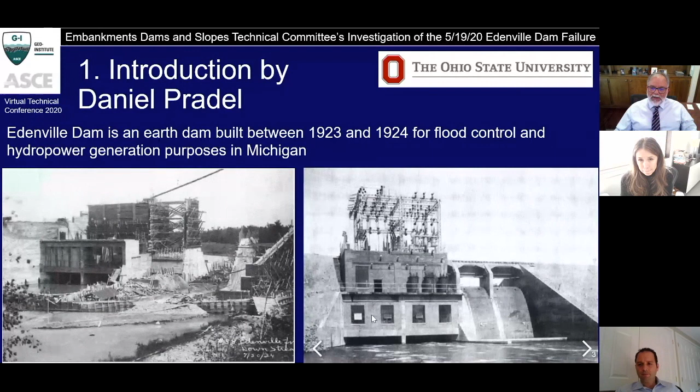Edenville Dam is an earth dam that was built between 1923 and 1924. It was built for flood control as well as hydropower generation. In the lower left, you see a picture taken on July 30, 1924. The earth dam is almost reaching its final elevation, and the power plant and the spillways are under construction. The lower right image shows the earth dam completed, as well as the spillway and the power plant. Something relevant about these years, 1923 to 1924, is that it was before the soil mechanics principles pioneered by Carl Terzaghi were widely known in the US, and before the quality control measures for soil compaction were proposed by Proctor in the 1930s.

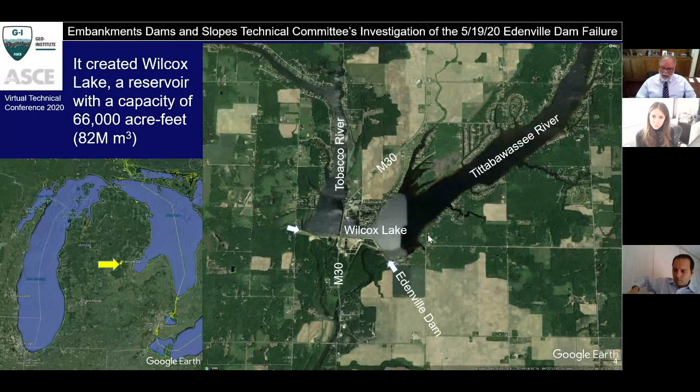In terms of setting, the Edenville Dam was built at the confluence of two rivers, the Tobacco River on the west and the Tittabawassee River on the east, and together they form Wixom Lake because of Edenville Dam. The dam is crossed by M30 highway at the site. Here is a view looking south where you see both rivers, the lake, Wixom Lake, the M30 road highway as well as the bridge, and the two spillways, one on the Tobacco River side, one on the Tittabawassee River side, where also the powerhouse was located. The failure took place where the yellow arrow is located, between the powerhouse and spillway and the left abutment of the dam. The total length of the dam for scale is about 2 kilometers, 6,600 feet, and it had a maximum height of 54 feet or 16 meters.

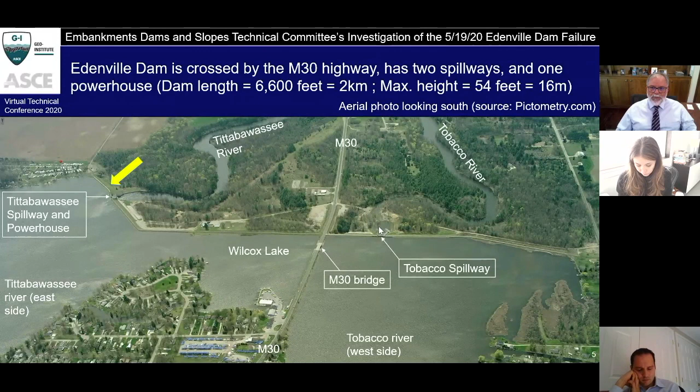What is particular about this failure is that it occurred during the day and was captured on video. Here you see the failure taking place. And also through Twitter, we have the exact location of the videographer, which is also helpful.

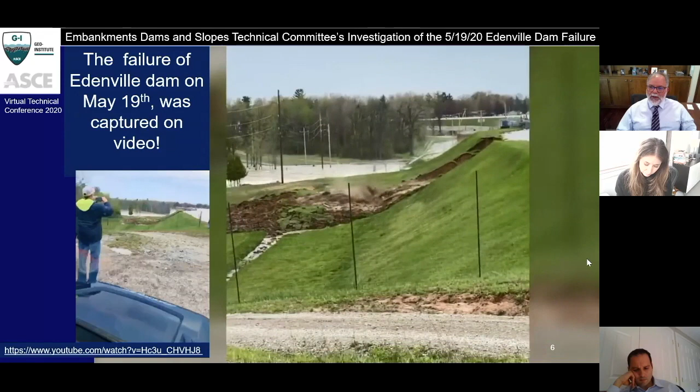After the failure took place, the dam breached and water started escaping Wixom Lake. We also have another video taken from the air about an hour later that shows how the breach rapidly enlarged and started sending water downstream towards Sanford Dam and Sanford Lake.

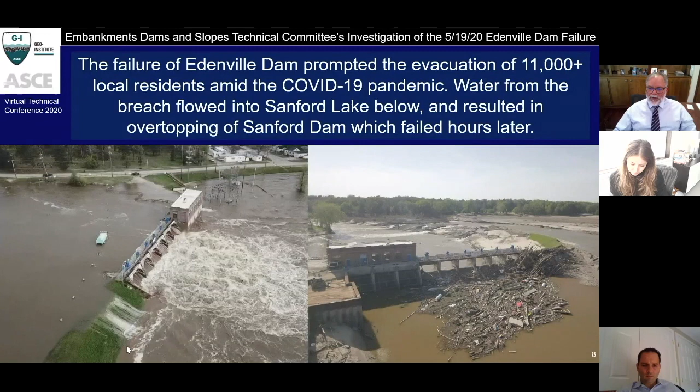The Edenville failure prompted the evacuation of about 11,000 local residents. This happened amid the COVID-19 pandemic. As Sanford Lake started to rise, very quickly Sanford Dam began to overtop, as you can see on the lower left of the image. This is Sanford Dam, which was built at about the same time using the same techniques as Edenville Dam, and because of overtopping, the dam was completely destroyed.

These dam failures resulted in devastating consequences in the local communities of Edenville, Sanford, and Midland, and many houses were removed off their foundations. We had a large amount of flooding and devastating consequences for many of the local residents.

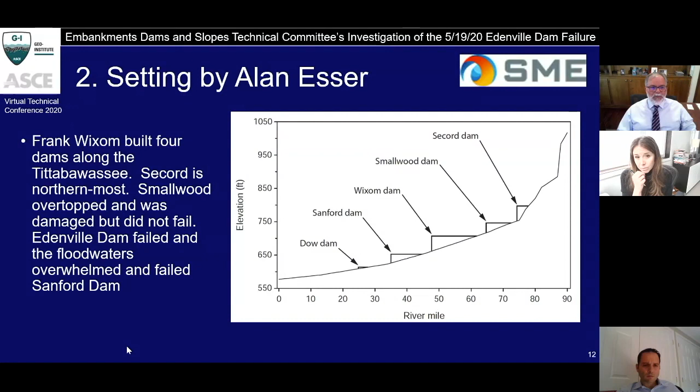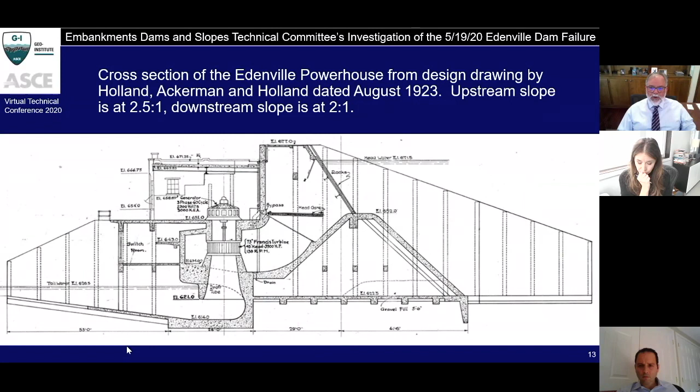Let me use some of his slides. The dam is one of a series of dams built by Frank Wixom. We have some cross sections showing how Edenville Dam was built. It had 2.5 to 1 slopes on the upstream side and 2 to 1 slopes on the downstream side. This is a drawing made in 1923 by the original designers.

The drains in the dam were vitrified clay pipe that was placed loosely with loose joints along the foundation soils. So in terms of consequences, we had loose permeable fill, poor or no foundation preparation, debris in the fill, and a homogeneous embankment, meaning a dam without a clay core was actually built.

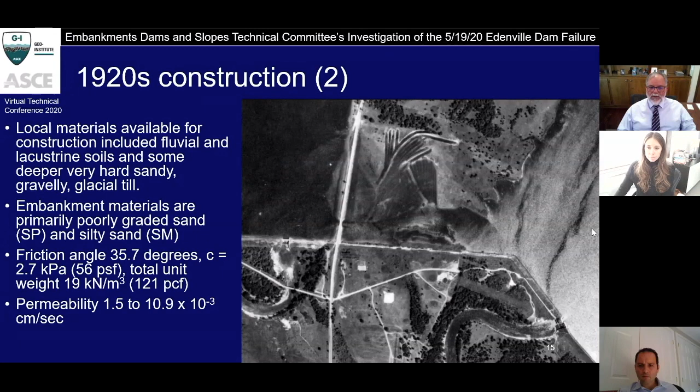This is one of many floods that have affected the area. Here you have some of the different discharge rates, but it doesn't look like the reservoir reached the elevation that we saw in the video a moment ago.

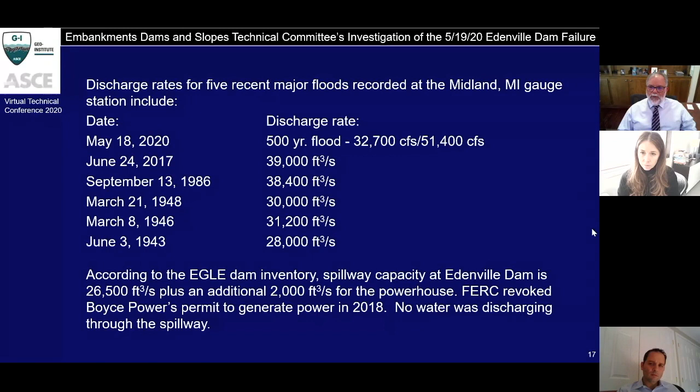In terms of accumulated precipitation, we have some stations in Midland, but also some stations north of the dams, and the precipitation appears to have occurred in the two days prior to the failure of May 19th.

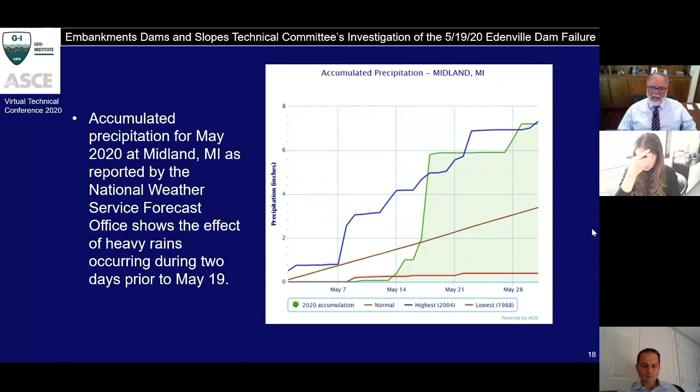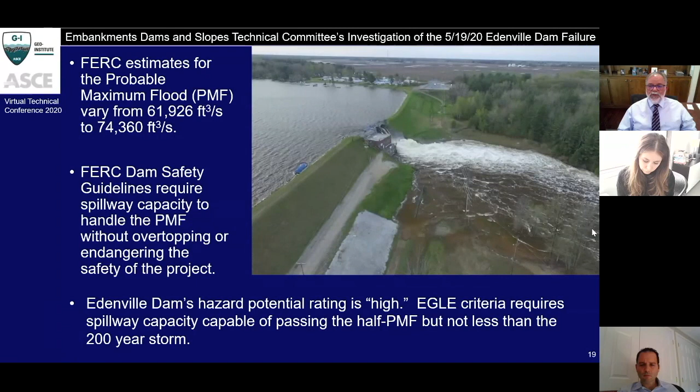The dam hazard was considered high, and sometime before the failure, FERC had removed the certification of the dam.

Next, Marin Clark is going to talk about the geology and geophysical testing. I'm going to discuss the geology and geomorphology beneath the dam, as well as the geophysical properties of the dam and foundation materials. This was based on field work done by myself and my colleagues Nathan Niemi and Dimitrios Zekkos, as well as a whole team of graduate students who were restless and desperate to escape their isolation during the pandemic.

The first thing I want to point out is that Edenville Dam was constructed in an area of really locally complex topography. You can see in the LiDAR elevation map on the left, the area in shades of green represents the entire river valley of the Tittabawassee River. In the white areas and lightest green shade, that sinuous shape in the upper left of the image is the active channel.

In the darker green and yellow-green colors, we also recognize a number of flat surfaces parallel to that active channel. With those features, we recognize former river levels of the Tittabawassee River that would have existed hundreds to possibly even thousands of years in the past.

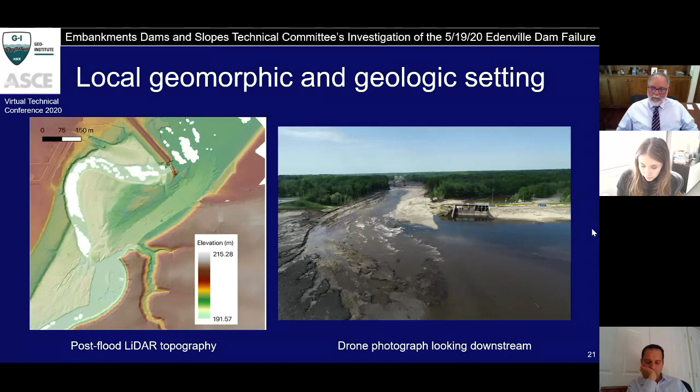Based on the topography and field observations, we can make a map like the one on the left and describe the sequence of terraces and river levels that exist in this area. They're done chronologically from youngest T1 up through oldest T6, and those also follow the lowest to highest elevations.

In the right-hand photograph, you see a picture of one of these river terrace levels. Importantly, we see preservation of the soil and organic horizon, with those little spikes being the remnants of drowned trees and other vegetation. This tells us two important things: one, there was no significant removal of the original surface prior to dam construction, and two, there was not a significant amount of burial or sedimentation following the impoundment of the lake.

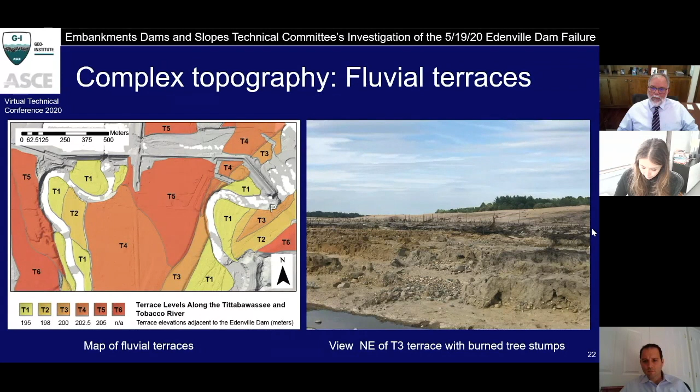Importantly, we also recognize that that vegetation was burned, leaving pieces of charcoal and other remnants of burned vegetation in the terrace levels. And so from that, we surmise that the vegetation was burned as a way of clearing the area prior to the construction of the dam. So, next.

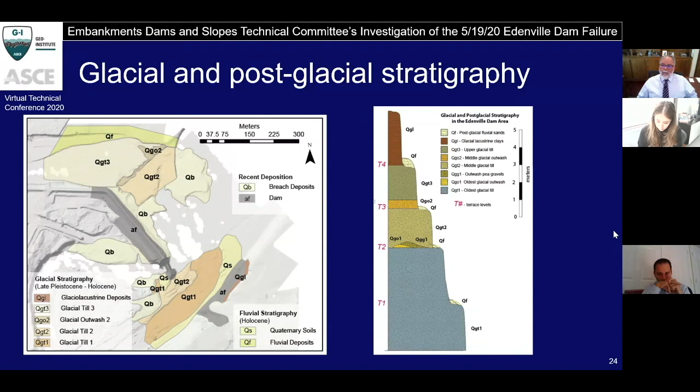So those terrace levels and the flood scour expose a layer cake stratigraphic sequence of the materials that are directly below the dam. And from that, we recognize three main environments of deposition. Primarily, the materials are made up of glacial deposits of Quaternary age, deposits of the Saginaw lobe of the Laurentide ice sheet. And then unconformably on top of that glacial sequence, we observe fluvial sands and then the buried soils and drowned vegetation I mentioned earlier. Those are of unknown age, but stretching certainly into modern time, right just prior to the construction of the dam.

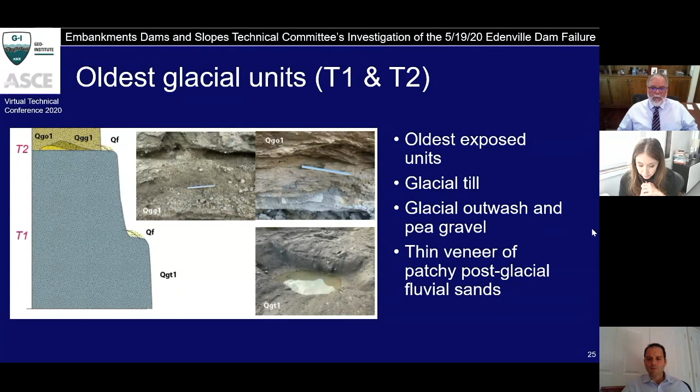Next. This is a picture of the lower sequence of the glacial tills, and we recognize 3 different conglomerate units. These are matrix-supported conglomerates with pebble to boulder-sized clasts. We interpret these as lodgement tills. Locally, we see very thin, only locally indurated pea gravel and sands, which we interpret to be glacial outwash.

Next. Above these 3 lodgement tills, we see that the sequence is capped by a reddish brown clay silt deposit that lacks sedimentary features, and we interpret this deposit to be a lacustrine deposit of a proglacial lake. This unit was similar to pieces of reddish clay material that we also found mixed into the dam deposit. Unconformably on this sequence, we see fluvial sands and flood deposits related to the breach itself.

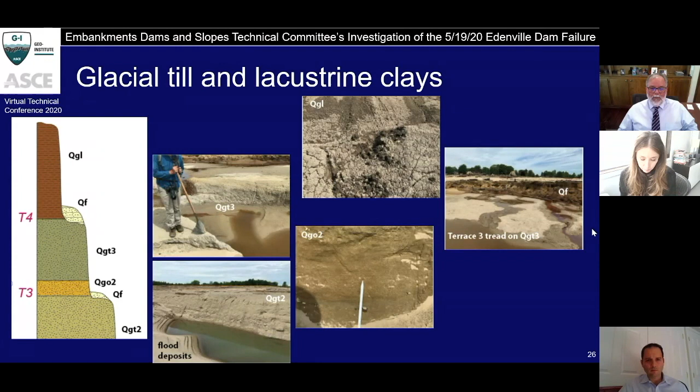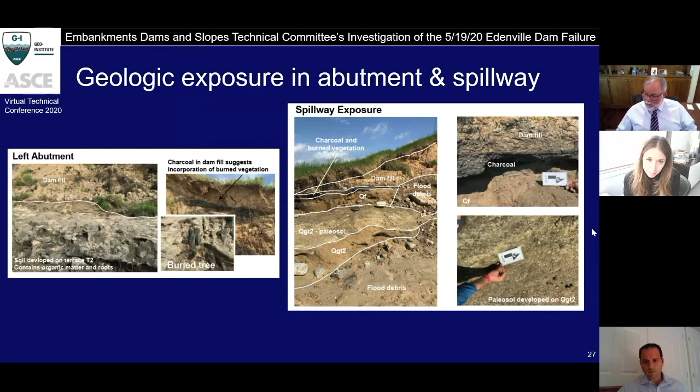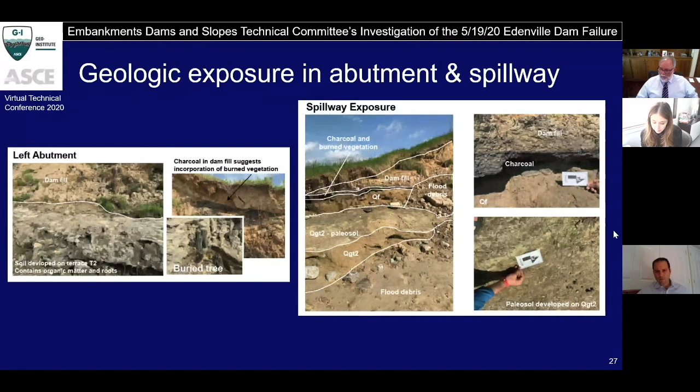Okay, now next. We can correlate the stratigraphy to interpret the geologic conditions at the base of the dam, primarily through 2 exposures on either side of the breach. On the left-hand side, you see a close-up of exposures in the left abutment. Importantly, we can trace the surface of terrace level T2 with the vegetation and burned vegetation layer directly underneath the dam deposits. We recognize that as an original layer through the bioturbation, vegetation, and tree roots. We also see charcoal in the dam, which suggests that the dam materials incorporated the burned vegetation nearby. We also see the burn layer exposed in the spillway exposure in the right-hand photograph here. Here, that charcoal and vegetation layer is on top of terrace level 3, or T3, and it also exists directly beneath the dam toe.

Next. Here, importantly, I just want to point out a correlation of the location of failure, which is shown in the left-hand picture, a topographic image, with the failure location shown by the red line with the Roman numeral 1. Dimitrios is going to talk a lot more about how that position was located in the next section. But here, I just want to draw your attention to the fact that it correlates with a change in elevation from the T3 to T2 riser. That's the step in topography between terrace level 2 and terrace level 3. So that projects right into the location of the dam at failure. Okay, next.

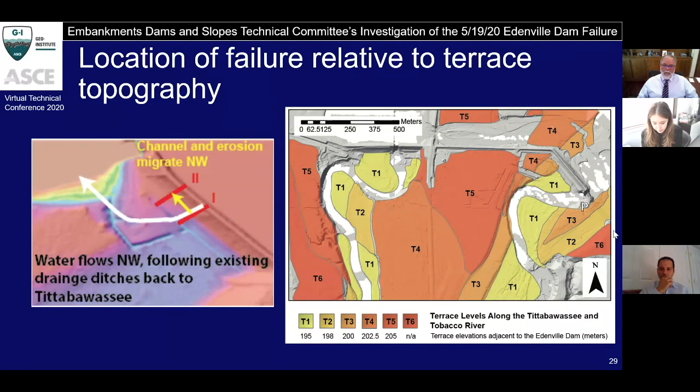So we also conducted a number of geophysical surveys along the northwest of the spillway, along the intact portion of the dam. We conducted seismic and resistivity surveys, both a P-wave and MASW survey using a hammer source, and an electrical resistivity tomography survey in the same position. Next.

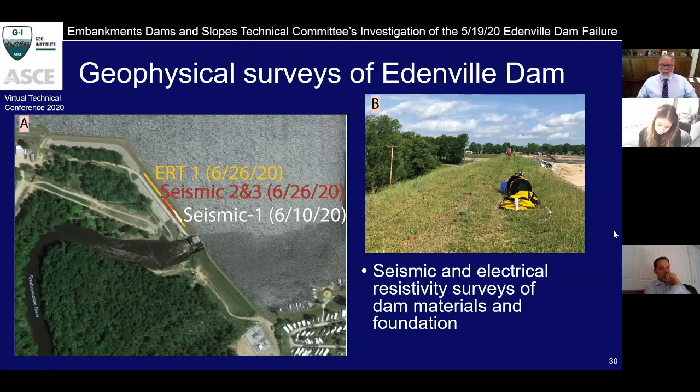This is a summary of our seismic results, and we observe generally very low velocities within the dam materials with a very sharp contrast to higher velocity materials at about 12 meters depth, which is in good correlation with our topographic profile estimates of the dam fill thickness. We see both low velocities in P-wave as well as surface waves, consistent with the low density materials inferred from the material testing.

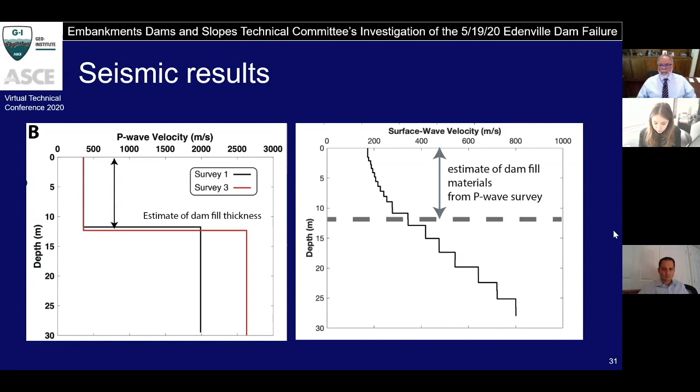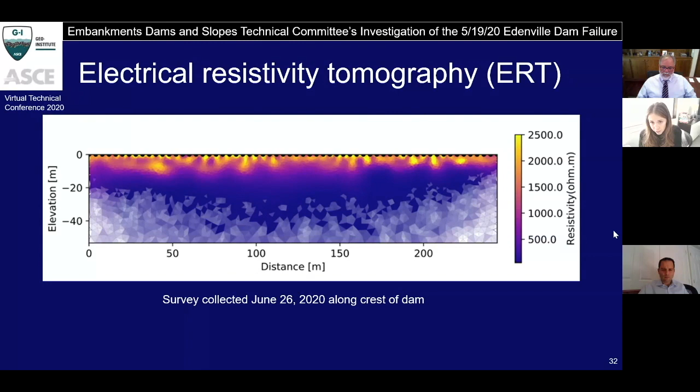And this is also consistent with the observations of the dam materials as being mostly dry, poorly sorted sands and silty sands overlain over clay-rich till deposits of glacial origin and also likely to be saturated. Okay, next. So in summary, for the conclusions of the geologic and geophysical testing, I want to point out that the complicated topography exists beneath the dam due to the fluvial terraces, of which that topography may have contributed in some way to the localization of failure where it occurred.

Second, we observe a burn layer that suggests that the forest vegetation was not removed, but rather burned and left in place prior to the construction of the dam. And then finally, the geophysical attributes of the dam are consistent with the testing results. That is, that they're low density material properties that are rather homogeneous in nature. Thanks.

Colin? All right. Next, we'll have Dimitrios, who will be telling us about the UAV characterization of the dam.

Hello, everyone. It's a pleasure to talk to you today. I would like to acknowledge the contributors to this aspect of this work from UC Berkeley, University of Michigan, Elxis Group, and Indiana University. Also, Nathan Niemi and John Manousakis helped on the aspects that I will present on the digital image analysis. Overall, along with Michigan Tech, who unfortunately have a technical problem, so they will not present today, we all deployed a number of UAVs at different times and with different sensors.

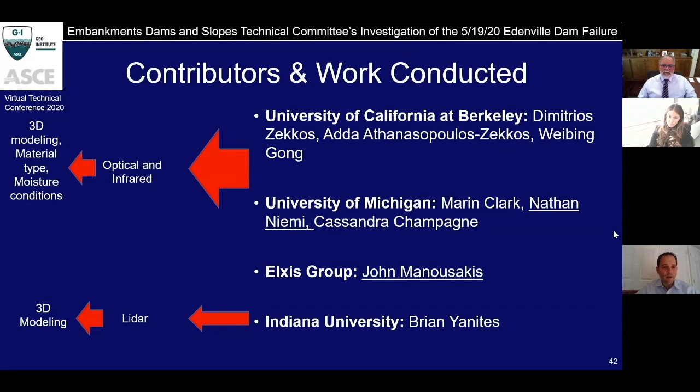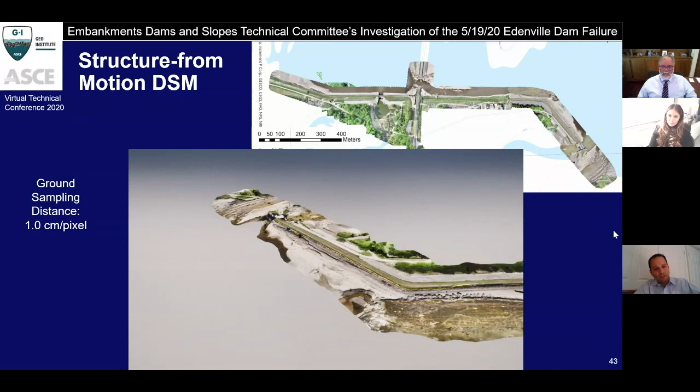What you see here is a flyover video of the Edenville Dam created with UAV imagery using the structure from motion technique. This was also something we're going to be discussing in a bit more detail, so maybe I'll present it now. The structure from motion technique, for those of you that are not aware, is a digital photogrammetry technique where we collect with the UAV overlapping photos of the target, in this case the Edenville Dam, and we stitch them together in the digital space to create a 3D model such as the one you've seen here.

Now, the model you've seen here is a high-resolution model. Each pixel is about 1 centimeter, and so you actually can see very significant detail. And also, it's important to note that you're able, on top of that model, to overlay other data, such as the infrared data that I will also present later.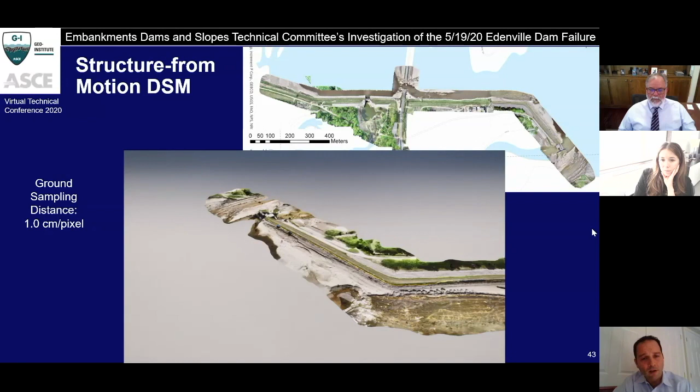The UAV with LiDAR by Brian Yanaitis and Indiana University was very useful because, along with the structure from motion technique, it allowed us to have a second view of the elevations that are involved after the failure. The figure to the right shows the elevations involved. And because LiDAR data was available at this site before the failure, we're able to take the difference between the two models and look at where sediments were removed due to scour during the failure, and where also they were deposited.

And I don't know if you can see it on the lower left figure. This is a picture showing that. We had a few meters of scour of the native material on the downstream of the dam after the failure. Next.

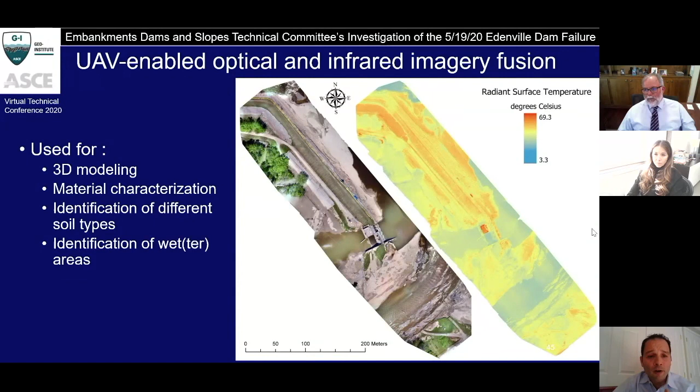We also fused the optical data and the infrared data that we collected. On the left of that figure, you can see an orthophoto, a photo that has accurate dimensions in 3D space of the Edenville Dam. On the lower part of that photo, I'm hoping you can see the bridge section. And to the right of that figure is a similar orthophoto from the infrared data. Basically, that gives you the temperature of the ground or whatever the target is at that time. Using this information, we're able to see different materials, concrete versus soil, sands versus clays, and also look at how wet the material is.

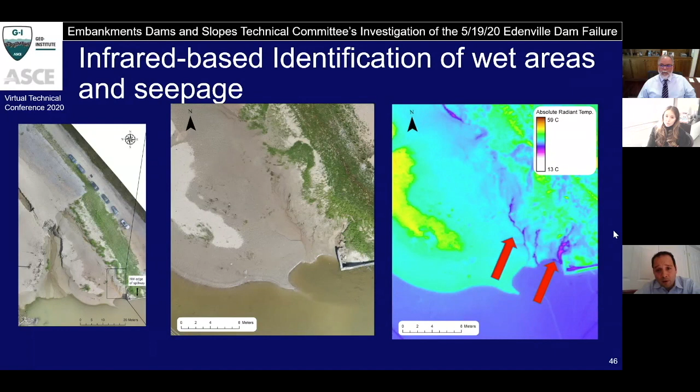Next. This is an example of how the infrared data is useful to look at the wetter areas. We are on the downstream side of the dam, close to the spillway. And you can see near the toe of that dam, there is actually seepage coming through. If you click one more time, Daniel, you can maybe see it visually. You can definitely see it when you're at the ground, but it's really easy to see in the infrared imagery. Basically, what you see there is where the water is coming out of the dam. You can see it as seeps, and they're shown as lower temperature material because it's wetter and the water in some cases is flowing, so they become really visible.

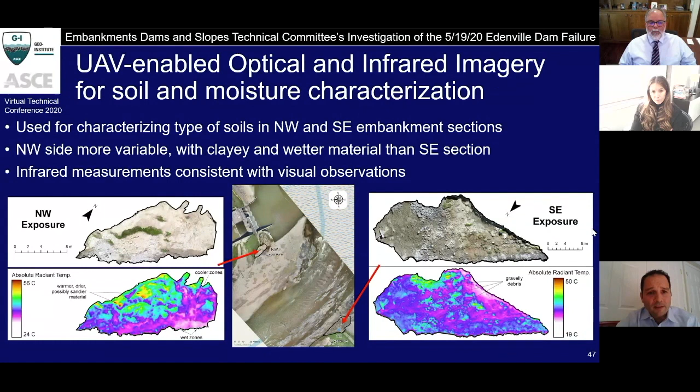We applied the same technique on characterizing the remaining exposures of the dam in the breached area, the northwest exposure and the southeast exposure. This is described in detail in the report, so I won't go through every detail here. But one thing we're able to see is how to separate clay and wetter soils from coarse grain, sandy and drier areas on that exposure. That information was mapped remotely, but then confirmed by the team with visual observations.

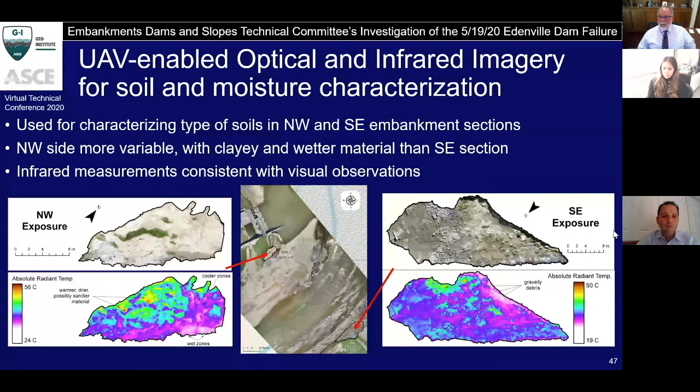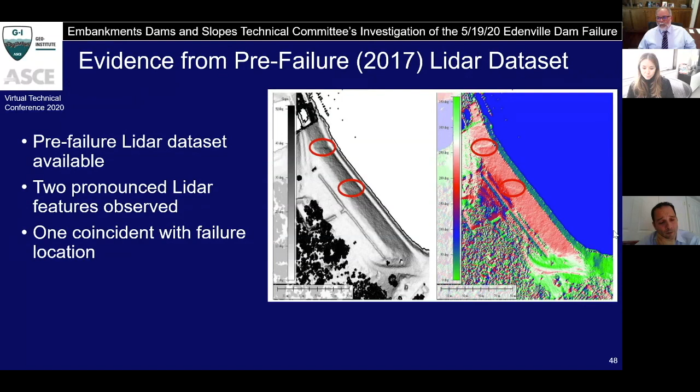One thing we had the benefit of in this project was a pre-failure LiDAR data set collected in 2017, basically 3 years before the failure. It's interesting to note that when you look at this LiDAR data set on the downstream side of the dam, there are two lineaments, two features that are really visible in the slope inclination imagery. On the left, shown in grayscale, that shows how inclined the ground is. The right figure shows the slope aspect, the orientation of that slope. You can see these two features standing out, although the rest of the dam is kind of very uniform. One of the two locations, the lower one in this figure, is coincident with the failure location.

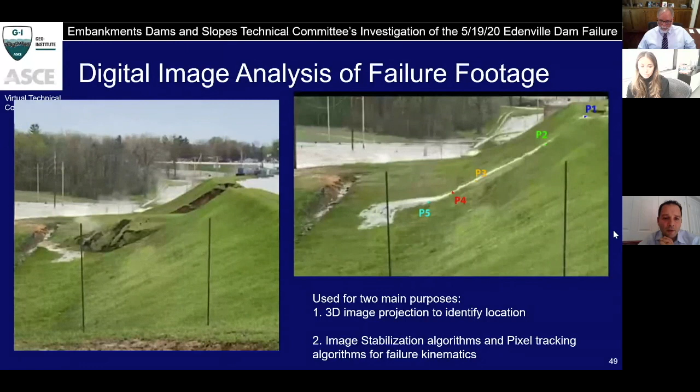We also took advantage of the failure footage that all of you have seen, which Daniel presented earlier, to better understand where exactly the failure is taking place in the dam. We did this with a 3D image projection, and also looked at the failure kinematics, exactly how things moved during the failure, which I will describe next.

The figure on the right shows examples from our reports, illustrations of how we calculated the location, using that footage and information from our own 3D model. We're able to look at features and pinpoint, with high accuracy, exactly where the failure happened. The figure on the bottom left is a photo available through CNN after the dam had been breached and was basically being washed away. We used that information to identify exactly what happened during the failure.

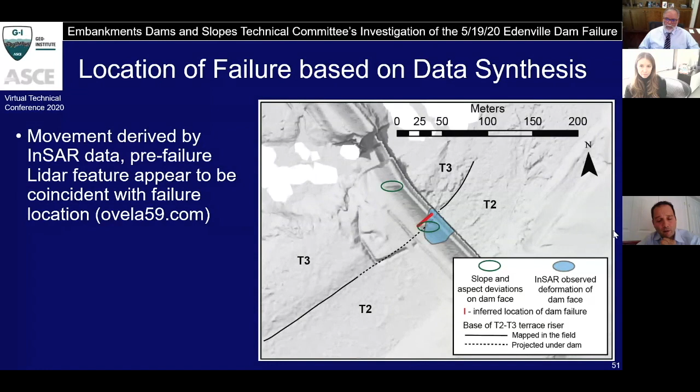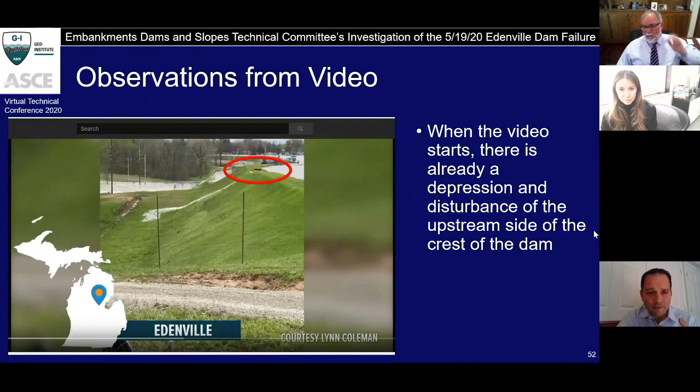Next. So these are observations from video, which will be discussed in more detail by Daniel next. But one thing I want to mention about this video is that when this footage available online was collected, at the top right of that image you can see the crest of the dam has already depressed some, so the video starts from that point onward.

What we did in the next slide is we stabilized the image we collected from the internet, to make it more stable and look at the same things in the same location. Then we applied pixel tracking algorithms. In the next slide you will see some pixels on the right figure. If you go to the next slide, Daniel.

We have 5 pixels that we're tracking here. We did a little bit of slow motion of the video, and we're tracking exactly how the failure happened in the location of these 5 pixels. And of course, you can do that with more pixels, but we think those are enough for us to understand what's going on. There's a 5th pixel that is lower than the 4th pixel over there and was never moved.

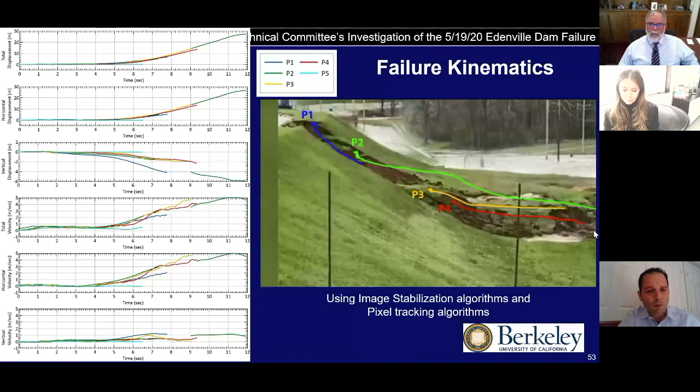Daniel, if you can go back and forth one more time to play the slide again. From that information, it's not qualitative at all. You are able to calculate horizontal, vertical and total displacement at the location of each pixel. This is shown to the left. And since you can calculate displacement and you know the time it takes, you can also calculate velocities in the X, Y, and total direction.

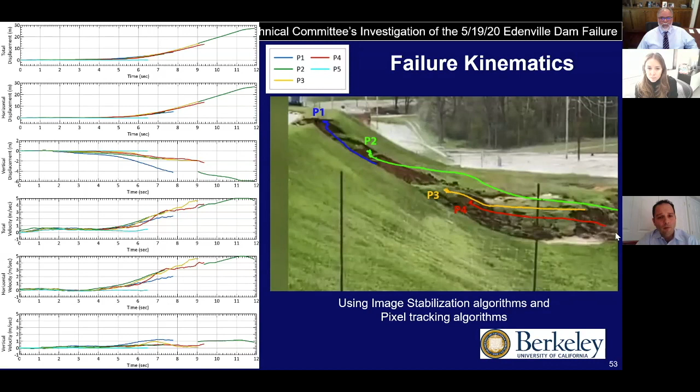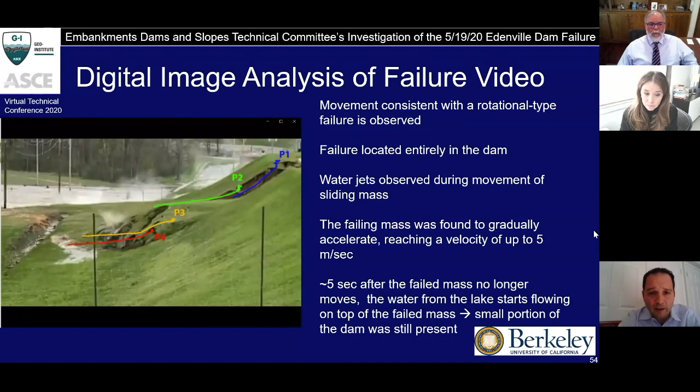Next slide. So, conclusions from that digital image analysis, which again are described in more detail in our report. The movement that you see, I hope you agree, is consistent with a rotational type of failure. The failure is located entirely in the dam, and doesn't involve the subsurface, at least what we see in this footage. There are water jets, and we'll discuss this later. Water is squeezing out of the mass as it's failing. And finally, the failing mass gradually accelerates, reaching a velocity of up to 5 meters per second based on our estimates from the previous analysis.

And once that mass fails, it becomes stationary, it stays there, and there are about 5 seconds from that point on until water starts coming in. So it's not like water came immediately after that failure. There are 5 seconds, indicating that a small portion of the dam was still present behind that failure.

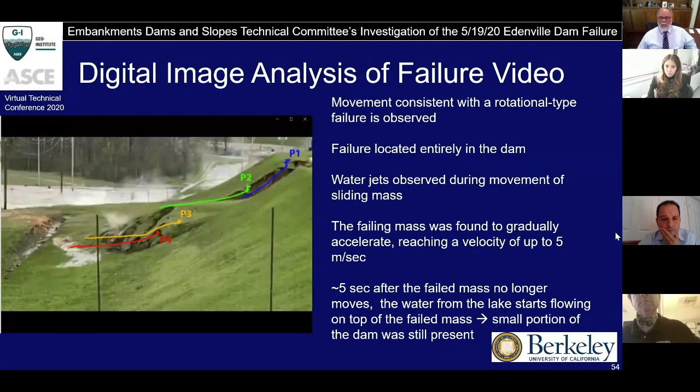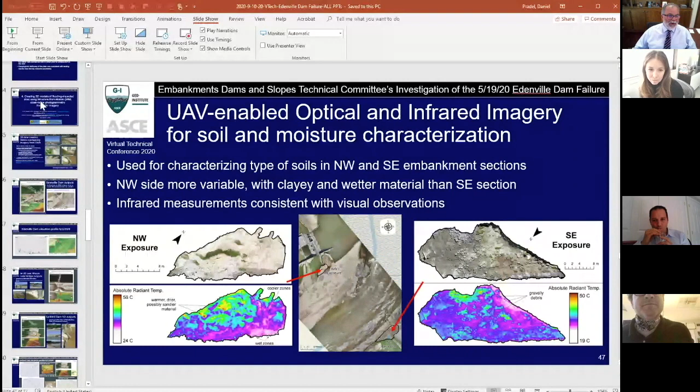Let me go back. Welcome back, by the way, Colin. Thank you. For some reason, I couldn't get promoted to a speaker while logged on as Windows, so I'm using my smartphone right now. Yeah. I normally blame it on Bill Gates, but I don't think it's appropriate here. All right. Thank you. Yeah.

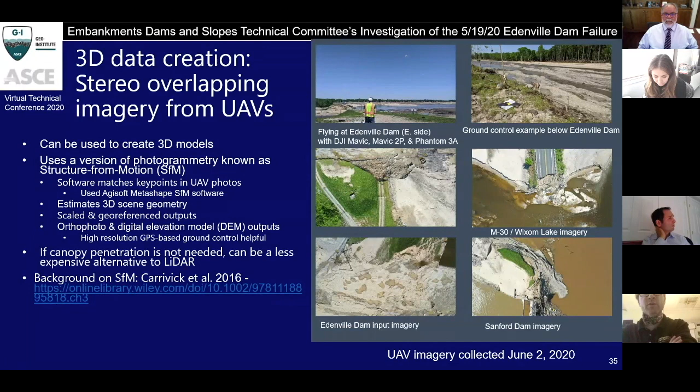And as was just shown, if you're in an area where canopy penetration is not important, this can be a high accuracy and less expensive alternative to LiDAR. There's more information in that Carrivick 2016 reference about structure from motion, if that's of interest. On the right are some of the input images, including some of the field photos. And we took those photos every few seconds in order to create the stereo overlapping imagery needed.

Here's a profile that we created from the structure from motion derived DEM, and those 5 points labeled on there are the same 5 points shown on the image on the right, and from that, the specific elevation values can be extracted.

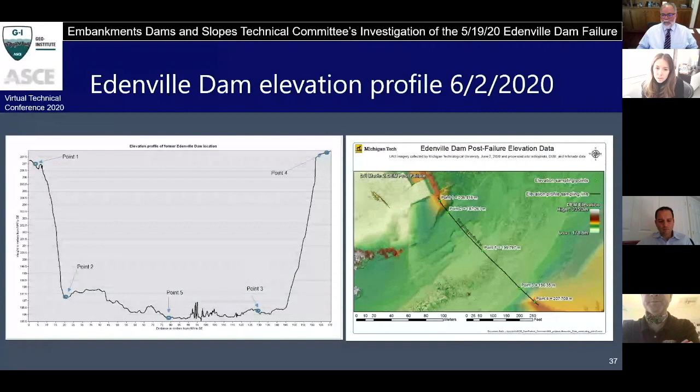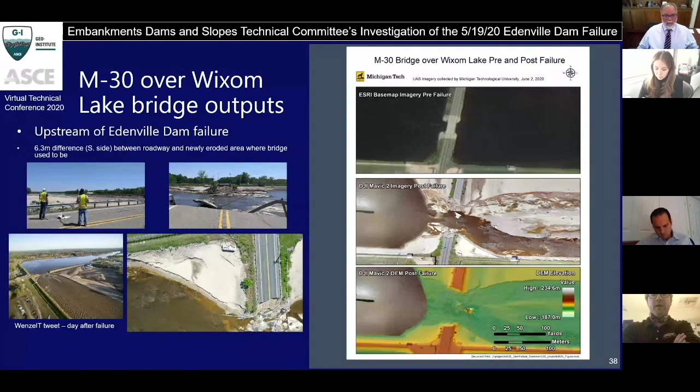We also flew over the M30 over Wixom Lake bridge site. This was a bridge that was taken out during this failure event. You can see there was a Twitter image on the bottom left. Essentially, where the bridge was located became a constricted area after the dam had failed. The water was pouring through, creating a significant scour event, and it took the bridge out and removed about 6 meters of material in terms of height.

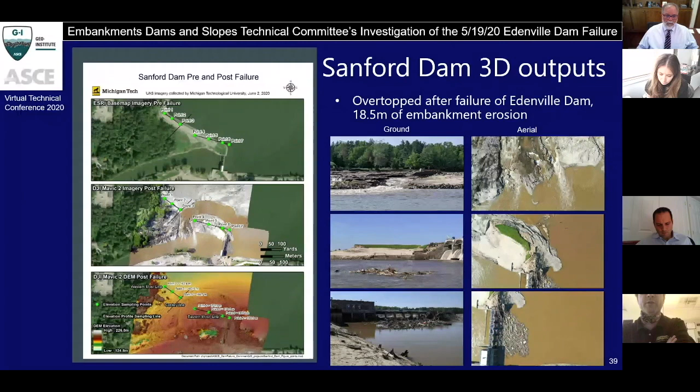So these are the results from that. For example, on the western end, between the lowest point and the highest point, we saw 5.2 meters of difference. In the central area, we saw 4.4 meters of difference. And in the eastern area, where the highest point was the dam remnants and the lowest point was the new scoured riverbed, we saw 13.0 meters of difference using the DEM derived from structure from motion.

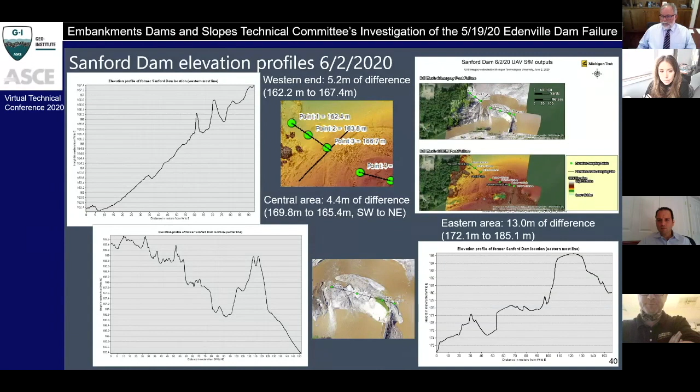And that's it for me.

Thank you, Colin. How are you? Thank you, Daniel. All right.

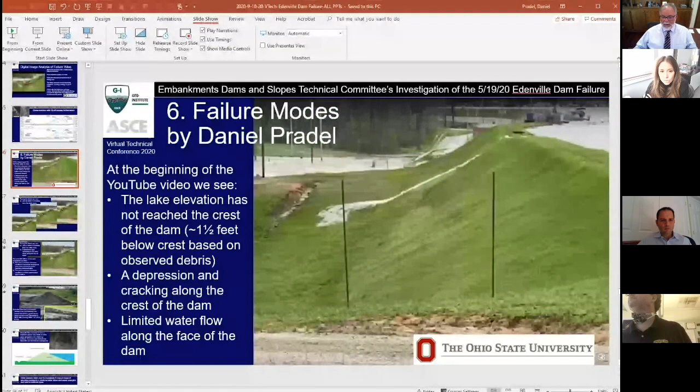So, I'll be talking about the failure modes. This is Daniel Pradel again. Dimitrios, a moment ago, told us about the first frame of the video, where we see in particular that the lake is well below the crest of the dam.

Our observations at the site showed what we call a scum line that was located about 1.5 feet below the elevation of the crest. We see a zone where there's very clearly a depression. This is the area that is going to fail in the video. And we also see a little bit of water that is able to flow down the protected side of the earth dam.

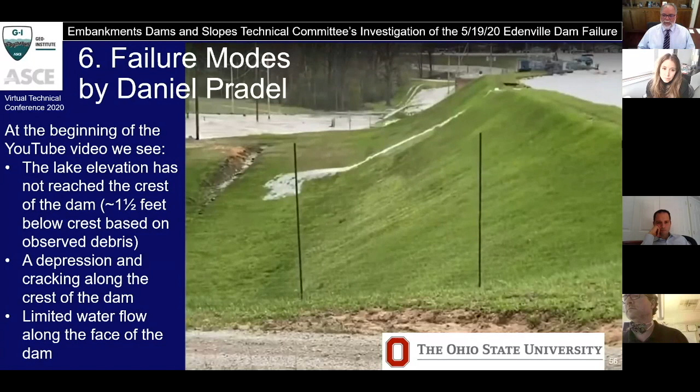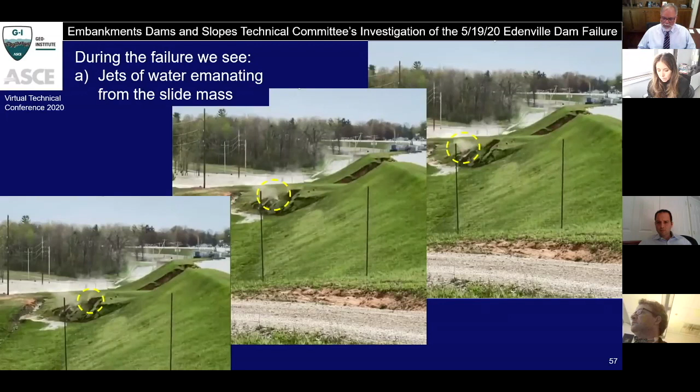During the video, we see in various frames jets of water. I've put in some circles where those jets of water are emanating from the fill that has failed during the slide movement. And that tells us 2 things. The first is that we're having really high groundwater pressures developing within the soils, and also that the material is contractive in nature. This was confirmed also by the low densities that we obtained from our Shelby tubes, as well as the contractive nature that we observed during shear testing.

I'm going to show you the video again, where hopefully you'll be able to see some of those jets of water emanating. But there's one more feature that we see: when the soils from the failure reach the toe of the dam, they spread in a liquefaction type manner of spreading. So let me play the video once again.

And therefore, there were 2 modes of failure that our team considered. The first one was that we had a rise in reservoir elevation that resulted in additional loading, in addition to additional pore water pressures within the dam, and that caused a rotational slide. The second possibility is that the additional loading from the rise in reservoir elevation caused static liquefaction type of failure of the materials within the dam.

In terms of modeling to see which of these mechanisms were viable, we looked at how the dam was constructed. As Marin pointed out, and as we've seen in the slides from Alan Esser, we have a dam that was built without a low permeability core. We also did not see any evidence of a toe or gravel blanket placed within the dam. The dam was mainly built out of sands that would typically be classified as SP or SM based on our testing. There was a system of drainage.

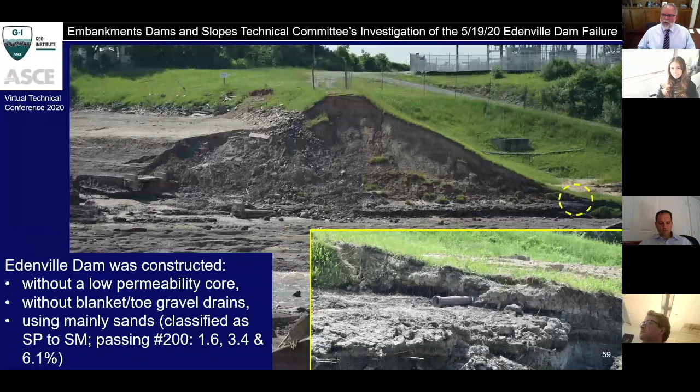In the area of the failure near the left abutment, we could see a modern pipe that likely connected to the vitrified clay pipes we saw in other areas of the dam. These pipes would have been placed directly on top of the natural foundation soils, and based on other geotechnical engineers here in Ohio who have worked on dams designed and built in the 1920s by Holland, Ackerman, and Holland, the typical design at that time was to put these pipes loosely connected at regular intervals along the foundation materials. These would typically reach a point within the dam around the protected side top of slope.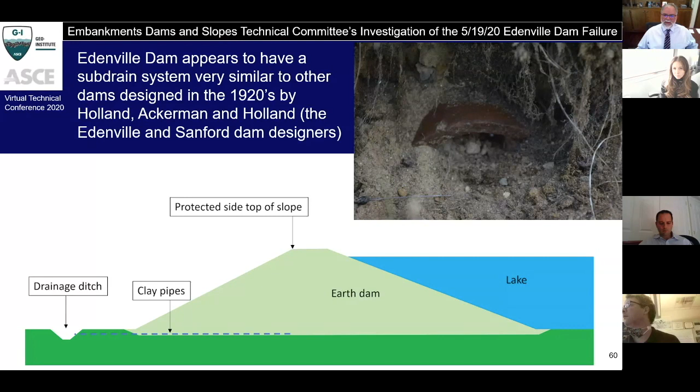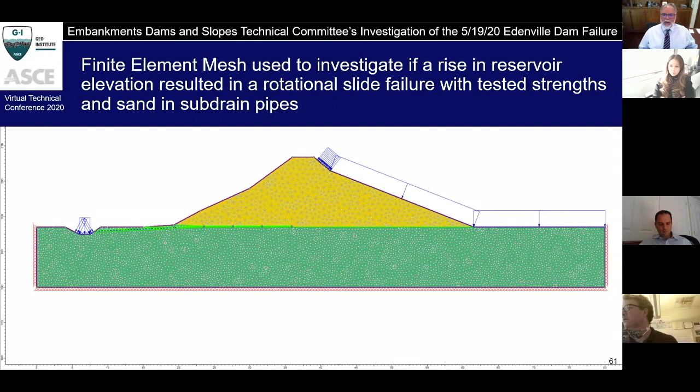So we did some finite element analysis. Here is the mesh that we used, in which we considered not only the dam but also these pipes, this drainage system with loosely connected pipes that would be partially filled with sand.

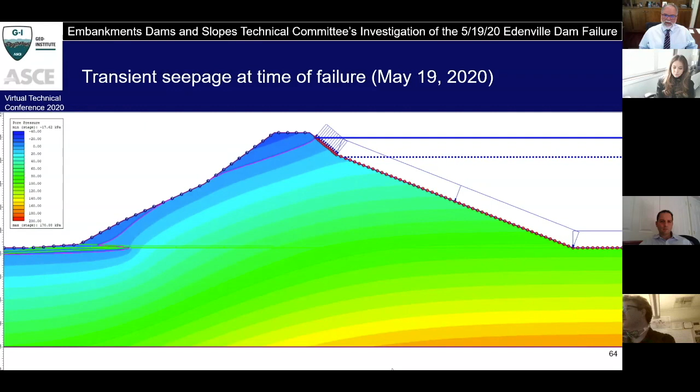Here, at the beginning of the storm, we see the elevation of the lake and the predicted phreatic surface, shown as the thicker line within the dam. As the reservoir rose, we did a transient analysis and the phreatic surface kept rising. By the time we reached 1.5 feet below the crest elevation, the phreatic surface was very high and probably reaching the face of the protected side of the earth dam.

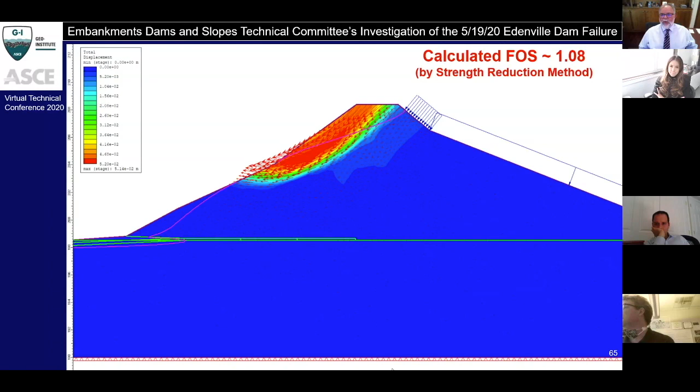When we calculate factors of safety with the strength measured during our direct shear tests, we find very low factors of safety for a failure of the downstream face. We have a failure relatively similar to the one we see on the video, and here we calculated a factor of safety of 1.08, which is obviously very, very low.

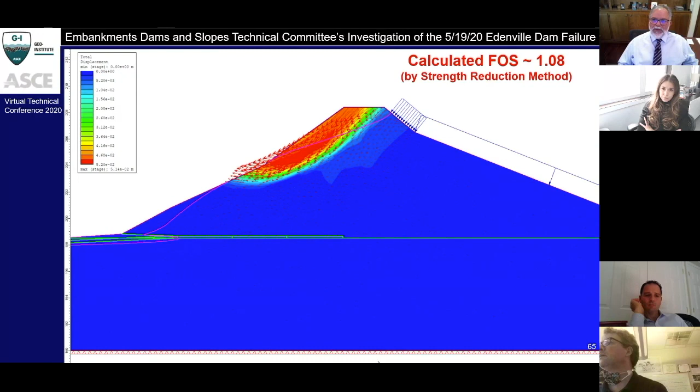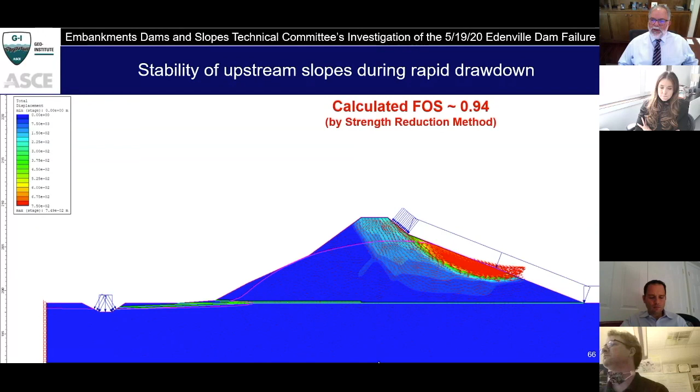Since the dam did not fail in our finite element analysis, we were able to pursue it and look at what happened when the reservoir was lowered. We find that the upstream face of the dam was also very vulnerable, with very low factors of safety, and we did observe some failures both when inspecting it and in the drone imagery that Professor Zekkos showed us a moment ago.

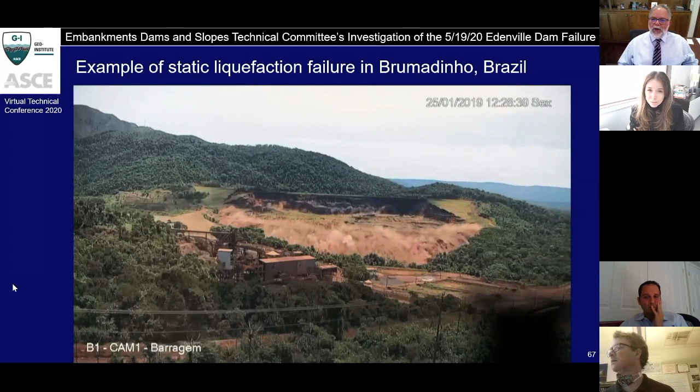For the static liquefaction mechanism, this is a mechanism that affected many hydraulic dams in the first half of the 20th century, but was recently highlighted by the failure in Brazil of the Brumadinho Dam. This is one area that still requires investigation.

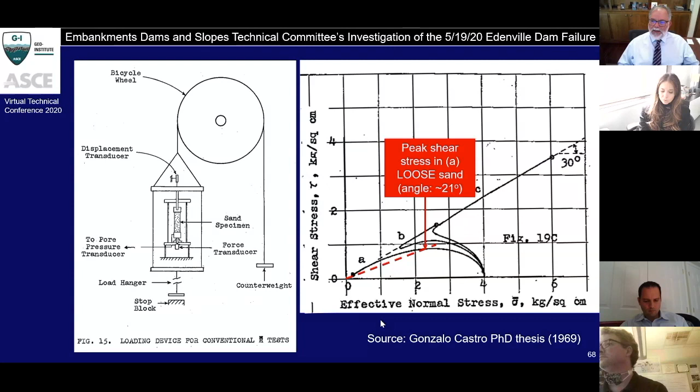In summary and conclusion, Edenville Dam is a rare case history of a failure captured on video, which the EDS team was able to analyze not only using modern tools and rapid deployment, but also supplementing that with traditional geologic and geotechnical techniques. These geological techniques, for example, showed us the difference between the T2 and T3 layers near the location where the failure took place.

The Edenville Dam failure is, I think, very important because we have hundreds, if not thousands, of dams in the U.S. that were built before modern geotechnical practices, such as the soil mechanics techniques pioneered by Karl Terzaghi, and the compaction control techniques proposed by Proctor in the 1930s.

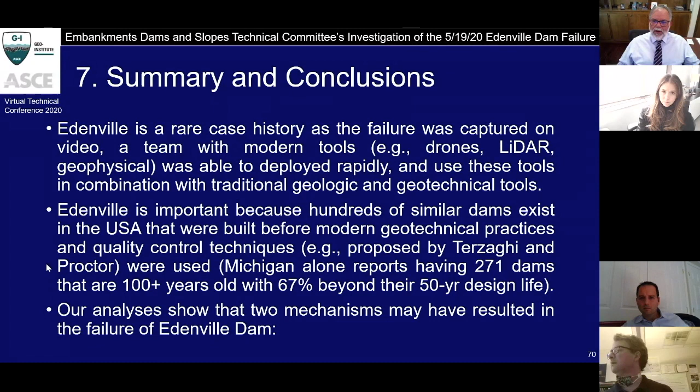In terms of mechanisms of failure, we consider two as being the most likely. The first one is a traditional slope instability type of failure, where we have the rise of the reservoir in combination with partially filled drains, in combination with a geologic feature at this site that resulted in a conventional type rotation failure. The evidence that we see of pore pressure generation and liquefaction is the result of the large displacements that resulted in the liquefaction type spreading of the slide debris.

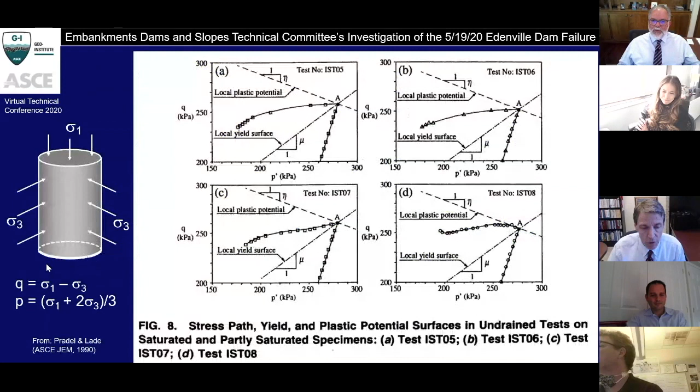The second possibility, which is worth investigating, is a static liquefaction, where loading from the reservoir caused static liquefaction within the central portion of the dam, and that lowering of the strength allowed the failure to take place. With that, the presentation is over, and Tim, I believe you're going to tell us about questions.

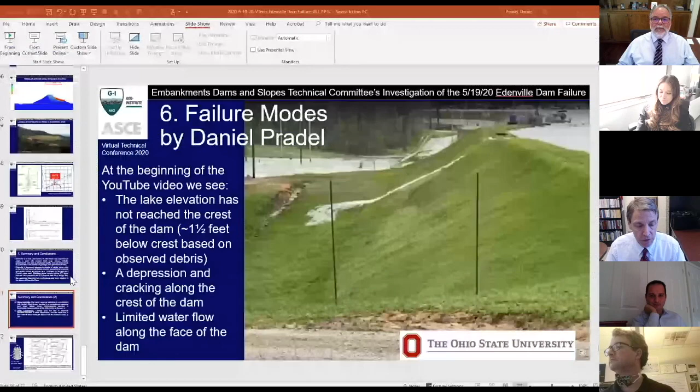Great. Thank you, Daniel. We have a few questions here in the last few minutes. First question, and maybe this is to you and Alan. Is Alan here? I don't know. He was trying to log in, but if not, I'll take it. You can lead and others can contribute.

Would a cutoff wall installed in the 21st century have saved the dam? And so you could look at not only a cutoff wall through the embankment, but if the cutoff wall needed to extend into the foundation as well. Well, I did some calculations in which the drain was fully functional, and I got factors of safety, going from memory, that were around 1.4. So without the water pressures, or without water allowing for static liquefaction or slope instability failure, probably the dam would not have failed.

Okay, next, how much cohesion, if any, was measured in the direct shear test? Was this cohesion used in the stability analyses? Yes, we found a very small amount of cohesion. I can pull out the number, but going from memory, it was in the order of 20 or 30 pounds per square foot. So not a lot of cohesion. The material had very small amount of fines. And yes, we did use the cohesion that we measured in our test in our slope stability analysis.

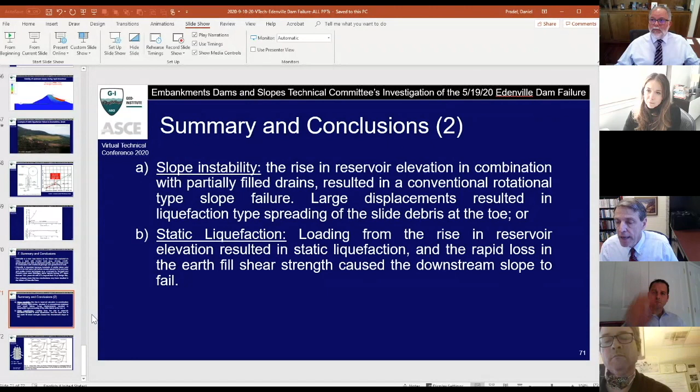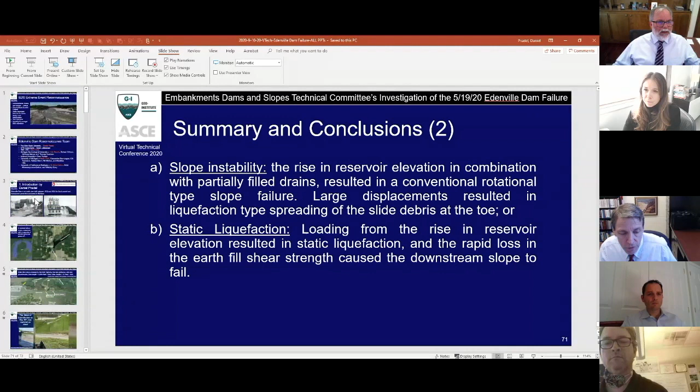Okay. Next, there are a lot of questions about the videos, so let me touch on that. The videos of this will be available within 24 to 48 hours. The videos of the failure are available on YouTube if you just search Edenville Dam. Tim, if I may say, the YouTube information is available on the slides, like this one and this one. And I understand that all the conference participants are going to be able to access the video of the failure so they can have the YouTube videos information. Yes, that'll be within 24 or 48 hours of this.

Maybe last couple questions here, and we're going to have to sign off. Do you have any soil borings of the portion of the dam which did not fail? Marin, do you want to handle that one? Sorry, Tim, can you repeat the question? I didn't hear the last part. Do you have any soil borings of the portion of the dam which did not fail? So we have collected a number of samples from both the exposure at the spillway as well as the upstream embankment, but those haven't been tested yet.

Okay, that leaves 12:29. So we're going to have to sign off here. If you have additional questions, the questions are still coming in. Please email me or Daniel Pradel or any of the team members, and we're happy to respond to you. Again, the 200-page report will be published as a GSP. It is under our last review, so it'll be with the ASCE here shortly.